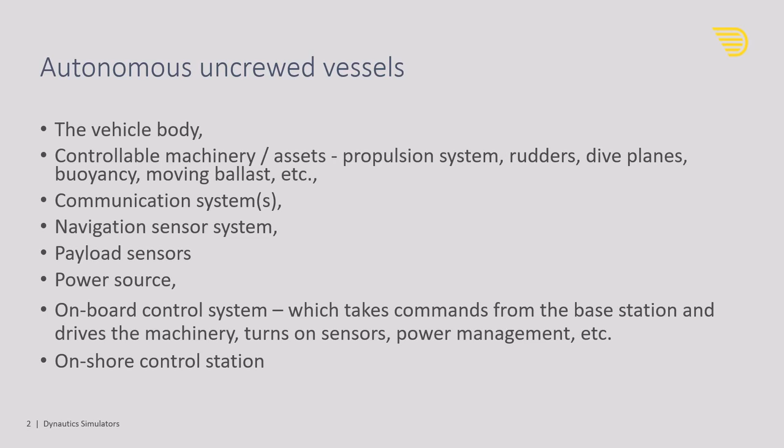When you're considering your mission requirements and the type of vessel you require, here's some of the other things you look at. While some of them are bought off the shelf, machinery, sensors, you're unlikely to be developing thrusters, servos, comm systems from scratch. However, if you're developing a new body, control system or onshore control station software, then these things require a lot of testing. If you're developing new control algorithms, then you'll definitely want to use simulation to help your development.

Why use simulation? To make testing more efficient. Sea trials are expensive, time-consuming and risky. Simulation provides a platform to test and evaluate the performance of vessels, equipment and systems in a virtual environment. Simulation minimises the risk of losing or damaging a vessel in trials. It produces a safe and controlled environment to test vessel performance and identify any potential risks.

Simulation allows for the exploration of different operating scenarios. This is important because it enables us to understand how our vessels perform in different conditions and environments, providing valuable insights that can help us improve efficiency and safety. Simulation tests both the onboard control system and the onshore monitoring and control console. This is essential in ensuring both systems are synchronized and are functioning correctly, providing a reliable and efficient vessel performance.

Simulation can be used for training operating personnel. It provides a realistic training environment that allows operators to practice and develop their skills in a safe and controlled environment. When you finally commence sea or lake trials, you can be sure you are doing so with all the teething problems addressed, so you can get the best benefit from the trials. Another reason we use simulation is to certify that the control system meets industrial standards. For instance, the IEC 62065 standard for testing track control systems.

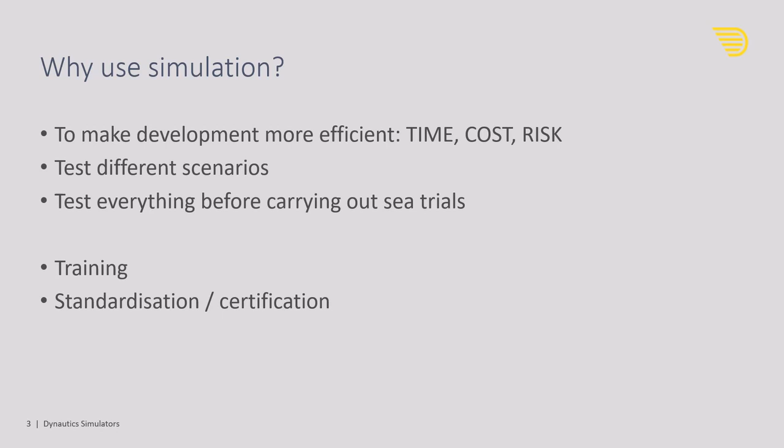What does a simulator do? Basically, the simulator simulates the wet stuff. The stuff that's expensive, time-consuming and risky to carry out at sea, and you want to get right when you do go to sea. The response of the machinery to the demands, e.g. you command 15% of maximum RPM on the main engine and it takes time to respond. Maybe there's a detent and it won't run at less than 20%. These things you want to simulate.

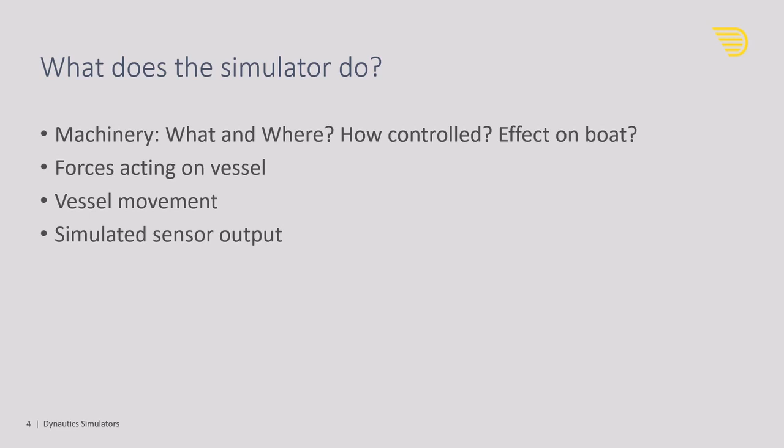The response of the vessel to the machinery demands and to the operating environment, tides, waves, etc. The response of the sensors to the vessel's movement and display of the resulting movement of the boat. This might be simple in terms of dials, readouts, or wireframe model of the vessel, or could be more complicated and show a 3D rendered view.

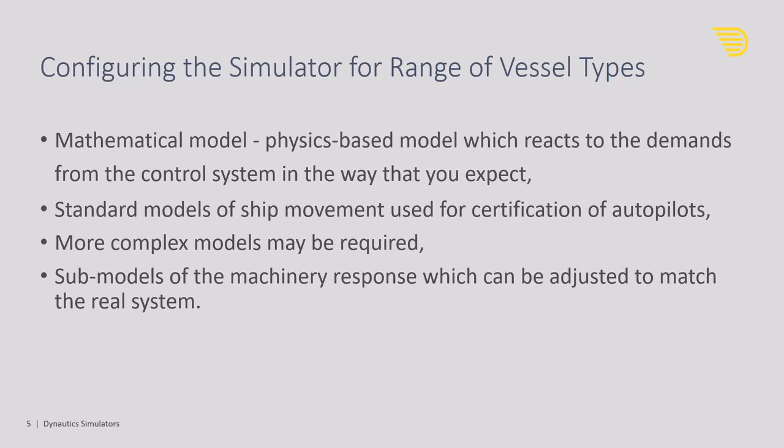A little bit more about the vessel response model. We don't think that you need a full CFD simulation of the detailed flow of the water and the wind around the vessel. You need a representative physics-based model which reacts to the demands from the control system in the way that you would expect. There are standard models of ship movement which are used for certification of autopilots. But more complex models may be required to model your vessel. Not just the vessel characteristics, also the machinery fit and specific machinery response, which can be adjusted to match the real system.

How to interface with the real world. Firstly, it's good to test the simulator using demands from within the simulator, so we provide user customizable sliders. As well as testing that the vehicle behaves as expected, you can use this mode to control the vessel directly and check the output from the sensors. Interfacing with the control system, different methods may be required, for instance serial, analog, PWM or digital signals. The Dynautics simulator provides a range of interface options and we're continually adding new ones.

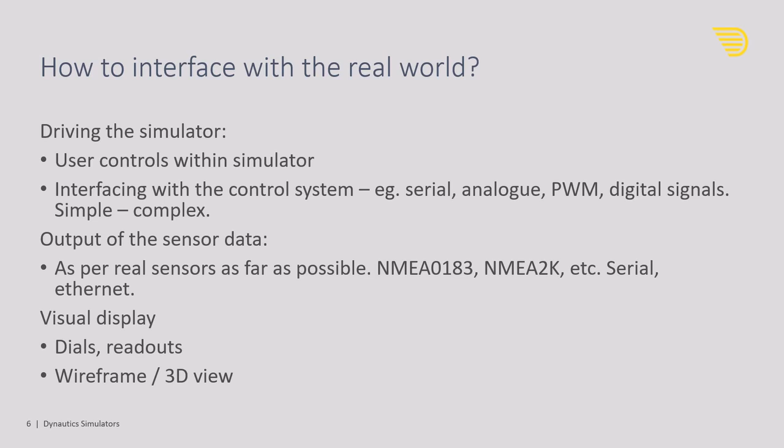You can send demands using a simple serial format which we've defined, or we can intercept the commands to the machinery, or we can measure the behaviour of the real machinery, obviously more practical for hydroplanes and rudders, etc. than engines. In terms of the output of the sensor data, it's best to mimic the real sensors as far as possible, so we support NMEA 0183 and NMEA 2000, etc. over serial and Ethernet, as well as analog and digital outputs.

To explain how we use the simulator to simulate a range of vessels, I'm going to go into a little more detail about ShipSim. The Dynautics ship simulator includes a composite model which allows you to equip your vessel with a range of engines, rudders and thrusters. We define these and link them to the sliders, to the input from the autopilot and to the simulation engine via a lookup table of machinery sockets.

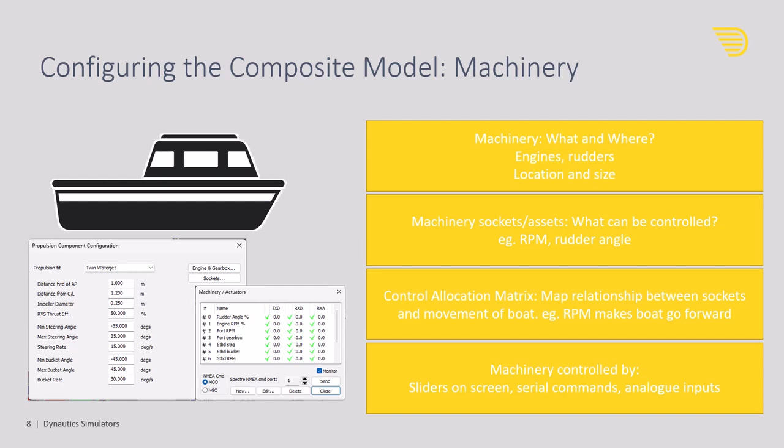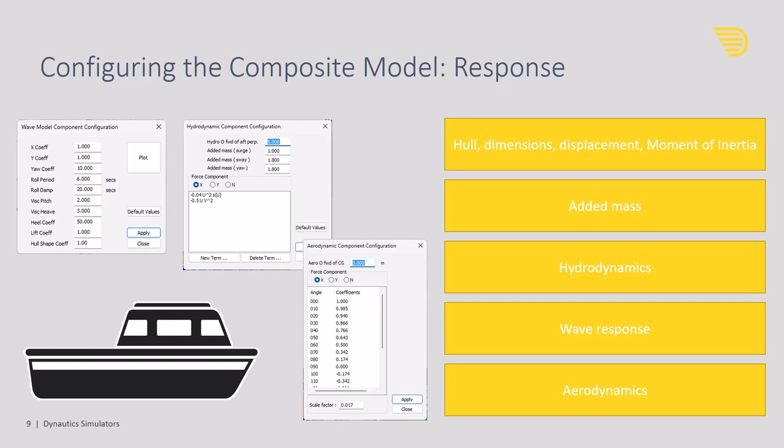We configure the response of the vessel by breaking down the effects into component parts. The hull itself with moment of inertia and added mass, the hydrodynamics, the response to waves, and the aerodynamics. And we configure the sensors fitted to the vessel and the way in which they output their readings.

So, coming to the end of the introduction to our simulators, I've talked about when you would use simulation and the features provided by our simulators. Please watch our videos which demonstrate using our ShipSim and AUVSim simulators to model a variety of vessel types.